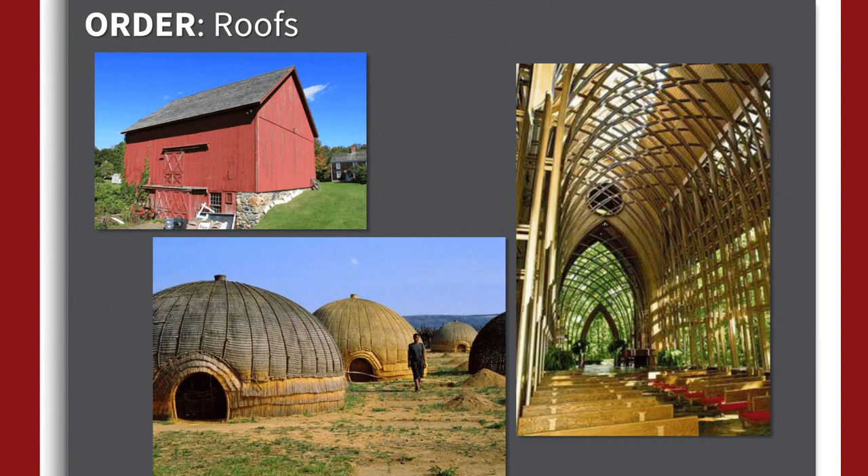Whether it's a barn, traditional African dwellings, or in this particular Fay Jones church in Arkansas, a sense of the sky as well. When roofs are either too complex or not complex enough, we're confused.

One more order notion, I guess, is markers. Markers in a space provide us a scale reference. There's a reason that we love the columns in the quad: it's because they're the same size as us. There's a reason that we like the Burghers of Calais, because they represent us in scale and size.

In scale, ornament is a little bit like the words in a poem that allow you to gather your own view. I love the ornament in the Stanford quad because it's evocative of a variety of things for me, which will be different for Tia and different from Dave, whereas the other components I've just talked about provide us a place for the community to understand the space. Ornament provides us an individual place to enjoy the space and to interpret the space as we go through.

Composition, again, transcends cultures. In Japan, there's the ken. In the Western tradition, there's the golden ratio. You can see how the Greeks really understood that ratio, and then how the modernists, despite their stated break with the past, were using ratios and proportions to honor those spaces.

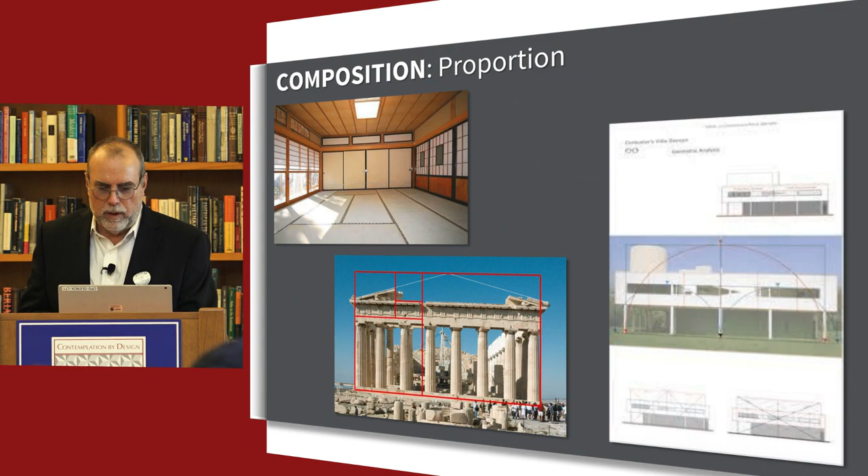When it's missing, we just see it. It just doesn't feel right. It feels uncomfortable.

Light, shade, and shadow. Light is the idea of being in the sun, in direct sunlight. Shade is where we see the passing of time across the courtyard floor or the arcade floor. And shadow is the absence of light. Those are three very different things.

You can move through them, and find yourself located in a very short order in three different kinds of locations. You can be in the warmth of the sun, in the shade and shadow, literally watching the day pass by on the floor, or in the darker parts of the space. That range of spaces gives us choice and an opportunity to be in different places, and they physically feel differently on our body.

Shade and shadow have cultural and regional components. In Copenhagen, where the light is at a premium, they're going to harvest it. They're not going to have overhangs. They're going to have as big windows as they possibly can. In the Sonoran Desert, you're going to be protected from that sun where you can be.

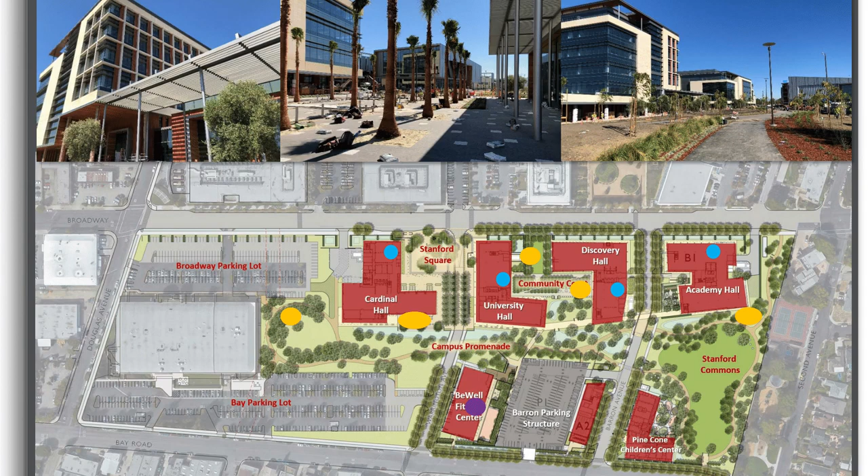I wanted to jump over to the Redwood City campus for a moment because this is a really important step in the university, it's a milestone. We'll have 2,500 staff members moving to this new campus next year. And Tia very appropriately brought up that we really need to make sure that we offer in this campus all those same opportunities and layers of different types of spaces.

So what you see here in the plan is really phase one, that's what we're building in phase one. And when you really start to look at those yellow circles, there's going to be a variety of places people can get away. In some cases, like in the Stanford Commons in the bottom right, you'll be able to sit under a tree but also maybe see activity in the Commons.

The campus promenade, though it's not the dish, will be a place where you can go out for a walk in between really rough meetings. We have an almost porch-like lounge adjacent to the dining pavilion where you can again take a breath, go out there, and sort of rejuvenate. And then there's some community courtyard spaces.

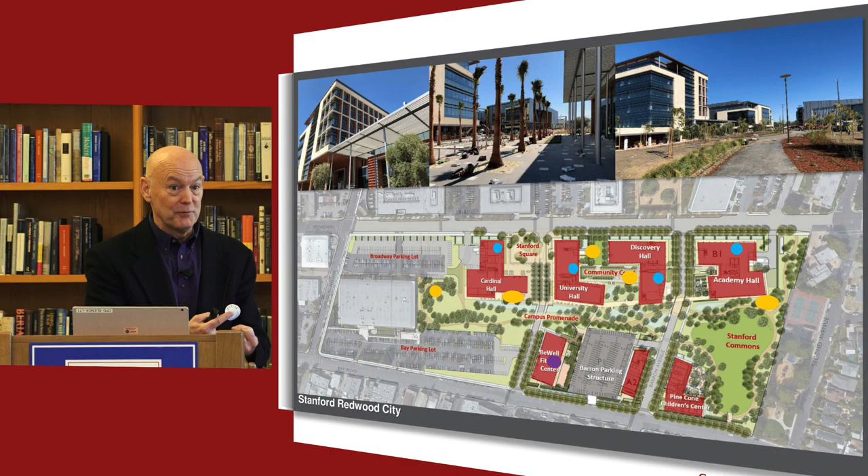There will also be a fitness Be Well center where yoga and meditation rooms are specifically designed to accommodate that, and the spill-out space outside of those rooms in the outdoors is also able to accommodate that. And then in our new way of thinking about officing, sometimes you can't even go outside quickly - you need respite and you need to recharge inside. So our new office philosophy, if you will, at Redwood City is we're providing less space for individuals but more space for people to collaborate and/or get away from it all in smaller areas.

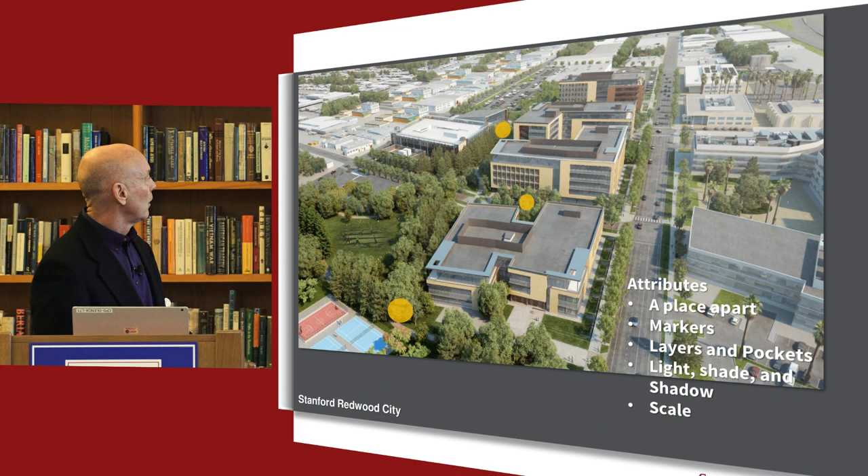And then this is our Be Well Center, again, great for yoga opportunities and meditation.

And a lot of the spaces that I showed you in the last 10 minutes were there more than 10 years ago as we started to conceive of what this Wendover Contemplative Center might be. But just as Jane Stanford sort of led the charge, we had strong leadership at that point that said we've hit that really critical tipping point where we need a dedicated center for meditation. And so we were really excited about that.

And you all, with all the construction that you see on campus, probably think that we just sit in a room and think up a building, and then maybe the next day we design it, and then the next day they build it, and then it disrupts everybody on campus.

It's not totally true. In fact, this building wins the award for, I think, having the longest gestation period for any project that I have been a part of. And that was because we didn't find the right place to put it, and we didn't have the right recipe. Until we got that, I think we held back, and I'm glad we did.

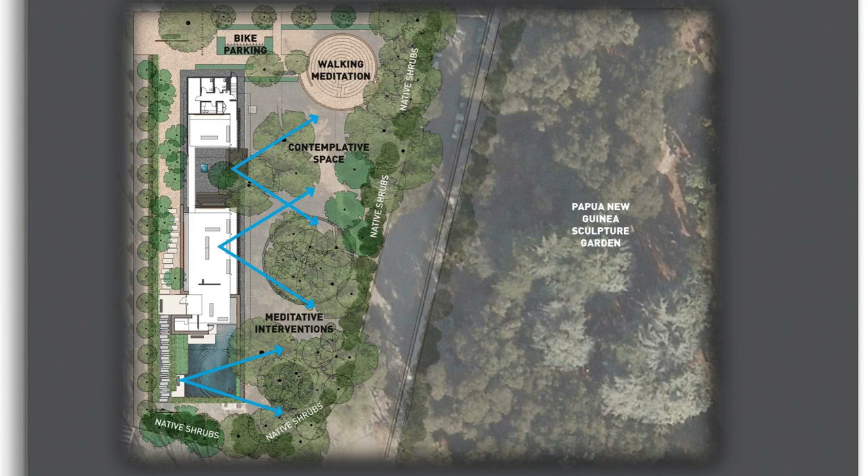Where we ended up, I think, was an absolute perfect place to put this. We understood it needed to be close enough to the campus center so students, staff and faculty could find it convenient. Being adjacent to a wonderful established space, the Papua New Guinea Garden, really helped anchor this building. We are still continuing to improve, and that road separating it from Papua New Guinea, we are transforming from a linear parking lot to a bike ped path, enhancing the landscape. So if you sit in Wendover and look out the window, you're not looking at parked cars, which is a good thing.

The architects on this were absolutely fantastic to work with, and they camped here. We interviewed them, we hired them, and then they came out and camped on the site. Why did they camp? They wanted to see student patterns, they wanted to see circulation, they wanted to understand the pattern of light, shade, and shadow in the morning, evening, and afternoon. They wanted to understand smells and sounds. How would this work? Before they even started designing, they really tried to understand the site and the setting.

I just want to take you through a couple of slides that talk about things you may not realize you're doing when you go to Wendover, but they were very intentional. The scale of this building is more residential, meant to make you feel more comfortable. The design is more unique. We didn't want to do a stucco building with a clay tile roof and put a window sign over the front door. This needed to be special, something that would attract us. And we wanted to embed it in nature. You've seen in other slides how important nature is for contemplation.